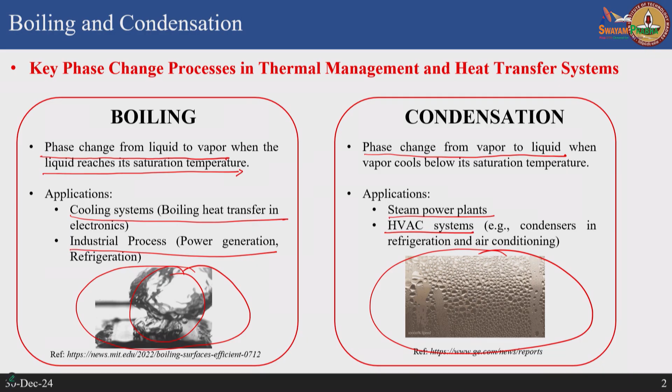That is because locally at the window pane your temperature is less than the dew point temperature, because it is not just a single component vapor outside. You should understand that in real life there is nothing like only water vapor - it is also a mixture of water vapor plus atmosphere. So as far as water vapor in this mixture is concerned, dew point temperature is more important than saturation temperature, because water vapor is only a fraction of the entire atmospheric pressure.

So you have to look at the partial pressure of water vapor and find the corresponding saturation temperature at that partial pressure - that is your dew point temperature. If your atmosphere is saturated with water vapor, the relative humidity is 100%, then the dew point temperature will be very close to the saturation temperature corresponding to the saturation pressure, because the air is saturated. It does not mean this is 100 degrees, because the saturation pressure of water vapor at that particular temperature will be limited, so you have to look at the tables.

If it is 30 degrees, for example, the saturation pressure may be something like 0.03 or 0.04 bar. So at that pressure, 30 degrees is your dew point temperature. If your local temperature falls below 30 degrees, and your atmosphere is completely saturated with water vapor, all of this is going to condense. You will see this formation of water droplets nicely on the mirror or glass surface.

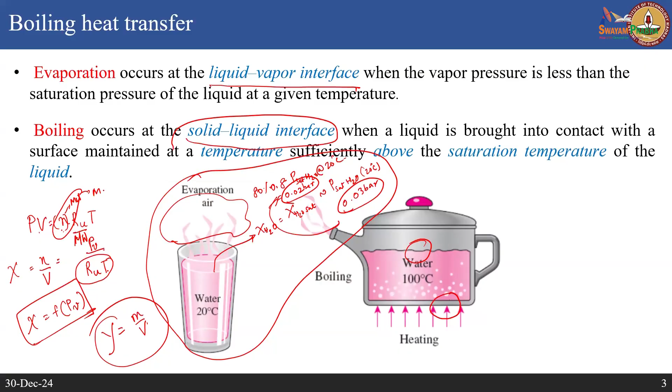So of course there is some evaporation happening here, but the boiling that we are referring to is the nucleation of bubbles that you see at the heater and liquid. So that is the boiling process, and what is the driver for this boiling? It is essentially temperature gradient. If you do not have temperature gradient, you do not have boiling, period.

Whereas evaporation can happen even without temperature gradient. You keep a drop of water on this table, and the water is isothermal with surrounding, and the table is also isothermal, but even then after 1 hour you will see the water droplet has evaporated. So it is only driven primarily by the concentration gradient, and of course if you have a heated surface, it is going to augment this evaporation process.

So why does the heated surface augment the evaporation process, although it is primarily driven by concentration gradient? The saturation pressure is a function of the temperature. If you are raising the temperature of the substrate, the saturation pressure goes up, thereby the concentration gradient increases. So at the same outside temperature of 20 degrees, if I heat my wall and raise it to say 60 degrees, my evaporation will be more vigorous because locally my saturation pressure is higher at the interface of the liquid and the vapor.

So although the evaporation process is affected of course by a temperature difference, it is affecting it through the Clausius-Clapeyron equation, which is basically relating the saturation temperature to the pressure, and not directly, whereas boiling is completely influenced only by temperature difference.

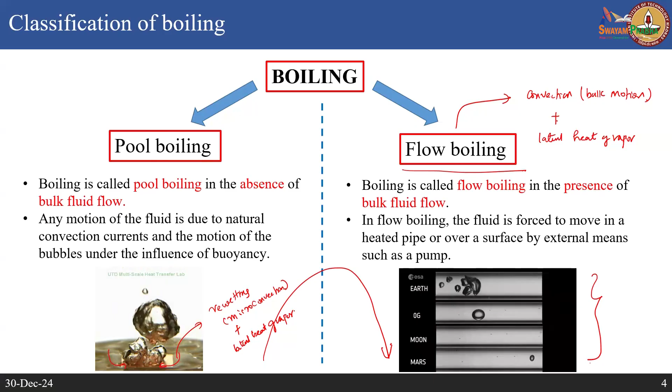Now, this is a very interesting picture from the European Space Agency. They conduct missions called parabolic flight tests, where they fly an airplane under different accelerations—negative acceleration, 0 g, and positive acceleration—to study different gravity conditions and how boiling, whether flow or pool, and the bubbles, look under them. For example, in this case there was a flow boiling setup carried on a parabolic flight undergoing multiple accelerations, and you see the normal 1 g condition on Earth.

So this is the kind of bubbles you see nucleating and then going, followed by some smaller bubbles at the back. Now, once you go to 0 g, the boiling process looks completely different. In large extent, if you look at pool boiling, these bubbles nucleate, grow, and then detach, and the detaching process is primarily driven by buoyancy. This is more prominently seen under 1 g environment.

Now, if you go to 0 g, or microgravity, where there is hardly any buoyancy force, then there is nothing to detach the bubbles. So what happens is these bubbles keep growing until they become very, very large, and then maybe at some point they detach because of some other instability or perturbation, but by themselves there is no buoyancy to detach them.

Now what you see in these tubes is some of these bubbles become so large that they fill the entire diameter of the tube, and then they have to keep moving on because of the convective motion. But in the pool boiling case, you will find these bubbles become very large and hardly even detach. This is also seen to some extent in smaller gravity conditions like the Moon or Mars, but 0 g is an extreme case where you hardly have any buoyancy forces for detachment.

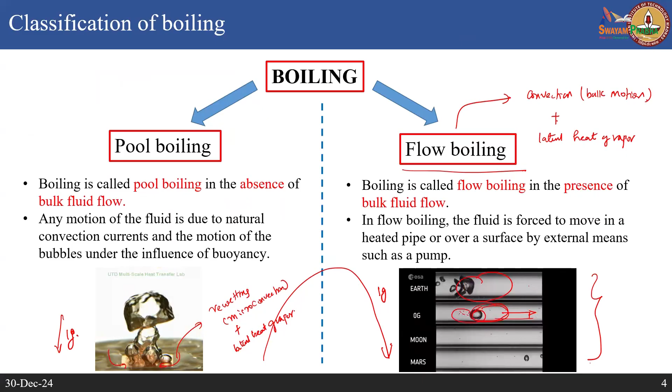What are the applications for the 0g case? Fundamentally, it is mostly about understanding the physics of boiling under different gravity conditions. Second, it's about designing boiling-based heat transfer processes in spacecraft cooling and thermal management, whether using pool boiling or flow boiling systems. You need to understand how they will perform at reduced gravity compared to terrestrial gravity conditions. At room conditions you may see excellent performance of your system, but once it goes there, you may see that the system is hardly moving, because the bubbles are all just blocking and nothing is moving. So you have to understand the fundamentals of this.

Depending on the temperature of your water when you start the boiling process: if you keep the water below the saturation temperature, that is the bulk of the fluid is below saturation while the substrate is heated above saturation, this is called subcooled pool boiling - this is a pool boiling case, which can also be extrapolated to flow boiling. In case your entire water is kept exactly at saturation temperature and your surface is heated above the saturation temperature, this is called saturated boiling.

You have to understand that subcooled boiling and saturated boiling can produce completely different boiling mechanisms. In subcooled boiling, boiling is initiated right at the interface of the solid and liquid in terms of small bubbles, which then have to rise as you keep increasing the heater temperature. As you go up, the temperature of the bulk liquid is much lower than saturation. It does not promote a state where the bubble can remain in vapor state - they collapse again, so they cannot reach all the way up to the liquid vapor interface.

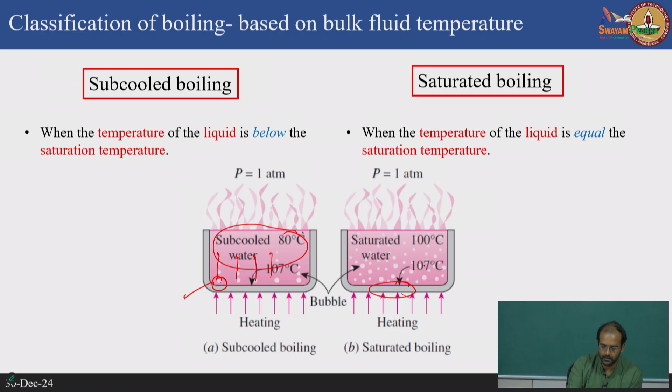Whereas in the case of saturated boiling, you will see there are two types of nucleation. One is called heterogeneous nucleation - why do we call it heterogeneous? Because this is happening at the interface of a solid and the liquid. Whereas here, because locally the temperature is above the saturation temperature, you can also have pockets of vapor that happen due to evaporation, which is called homogeneous nucleation.

So when you have saturated boiling, homogeneous nucleation also can happen, so you will have more vapor pockets everywhere within the fluid. Apart from the nucleation happening at the interface, you can also have vapor pockets spread all around your fluid, and you will see to some extent there is more nucleation of vapor pockets also on the liquid side.

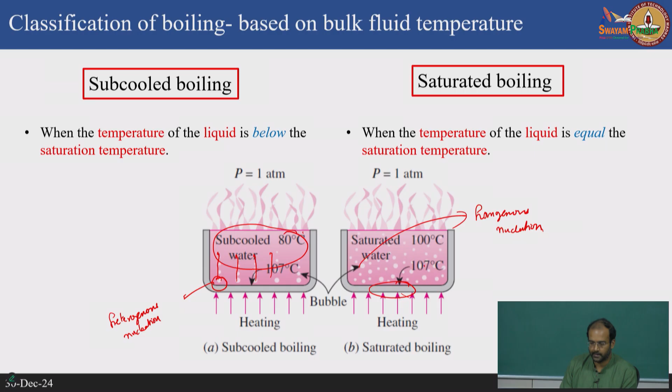Now let us quickly go through this pool boiling curve. This was considered one of the most fundamental and groundbreaking experiments as far as boiling heat transfer is concerned, and it was done under a saturated boiling condition - that means the liquid is at saturation temperature. You have a heater, like a wire - some kind of nichrome wire - and you supply power directly, DC power, to this heater wire, and in the process the wire gets heated and the surrounding fluid also gets heated. So this is the kind of experimental setup - it looks quite simple.

This was first done by Nukiyama, a Japanese scientist in the early part of the 20th century, and this boiling curve is named in his honor as the Nukiyama boiling curve. What he did was use power-controlled heating - he was able to control how much heat flux he supplied to the nichrome wire, rather than controlling the temperature of the wire. This boiling curve can be obtained either way: you can control the power and plot the boiling curve, which involves plotting the heat flux you are measuring or supplying to the heater as a function of what is called the excess temperature difference - the temperature of the wire or surface minus the saturation temperature.

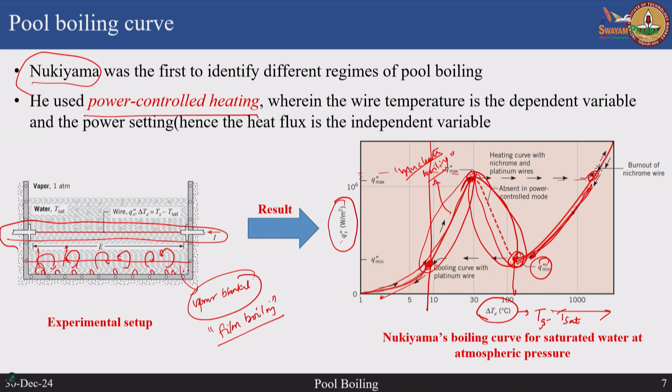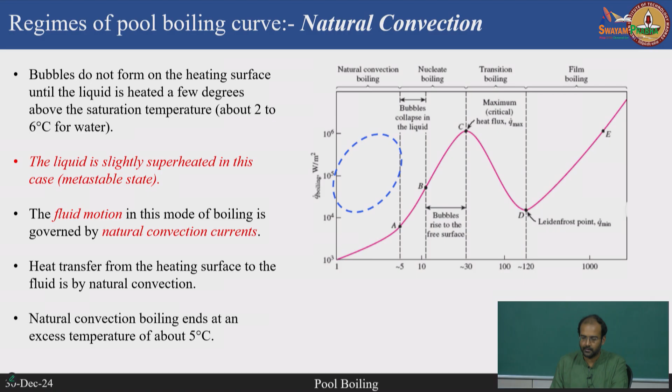The reason we should understand this boiling curve is that, as a designer, when creating any heat exchanger design, the flow rates and so on should be designed such that you never exceed the critical heat flux. Therefore you need to know how to predict the critical heat flux for a given condition. I think I have explained most of this process in a concise manner, but when I share this PDF you can go over some of the details.

One more question you should ask is why nucleation does not happen immediately after exceeding the saturation temperature. For example, at 1 atmosphere water's saturation temperature is 100 degrees. Why does nucleation not happen at 100.1 degrees, or at 100.2, but rather it takes 5 or 6 degrees superheat for the onset of nucleate boiling?

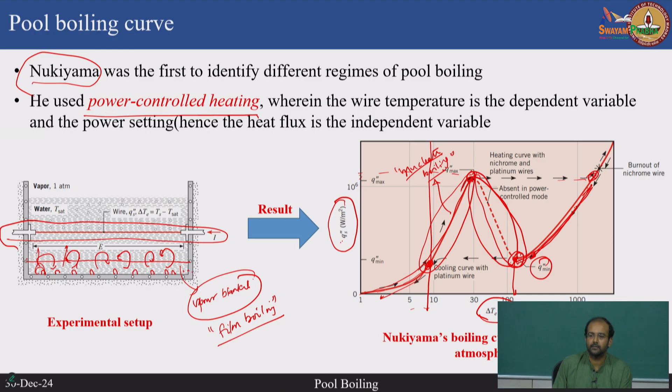The answer to that again comes from thermodynamics. Basically when you are talking about boiling, if you look at very small scales, maybe nano scale, if I have a roughness, a vapor pocket has to be created. This is the surface, and we are talking about a rough surface which has roughness elements. So where do these vapor pockets get created? They get created in these cavities where you have roughness. So you can actually alter the nucleation characteristics by changing the surface characteristics.

So now if this vapor has to be nucleated, assuming you have a small micro bubble generated within a cavity, it has to satisfy the Laplace-Young equation, which gives you the mechanical equilibrium between the vapor and the surrounding liquid. So you have a vapor bubble with a certain pressure inside, the vapor pressure, and outside you have the liquid pressure. These two pressures cannot be the same because the vapor is in a stable state, so there is also a surface tension acting normal. Therefore the vapor pressure has to balance the cumulative effect of the surrounding liquid pressure and the surface tension force. That is given by the Laplace-Young equation.

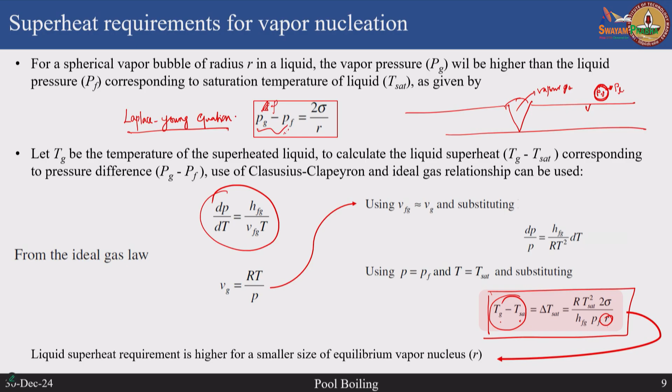Now, there are also some understanding from pool boiling experiments about other mechanisms, like how the diameter of the bubble behaves when it departs from the surface. So there is nucleation of the bubble, then detachment, and these bubbles keep rising up. So how do we calculate the diameter when it departs?

This has been looked at by different people, and there are primarily four forces acting on the bubble. When the bubble is still nucleating, you have surface tension, and when it is about to grow and detach, you have buoyancy and drag force. The buoyancy and drag forces attempt to detach the bubble because they act in an upward direction, while the surface tension and liquid inertia prevent the bubble from detaching. So essentially it's a balance between these upward and downward forces. For example, to calculate the average size of the bubble when it departs, you have to balance the buoyancy force with the surface tension force, since buoyancy is trying to detach it while surface tension is trying to hold it.

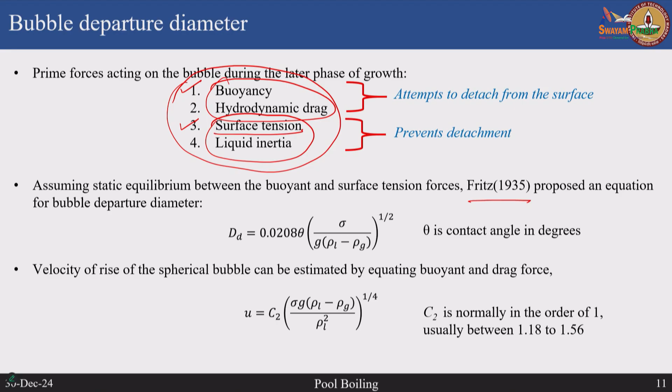So if you do that balance, I think Fritz in 1935 came up with this classical equation for calculating the bubble departure diameter, and from there you can also estimate the velocity of this bubble when it rises up.

Apart from the bubble departure diameter, you also want to know the rate at which these bubbles depart - whether there is only one bubble departing per second, or hundreds of bubbles departing in 1 second. These are also given by some kind of empirical model.

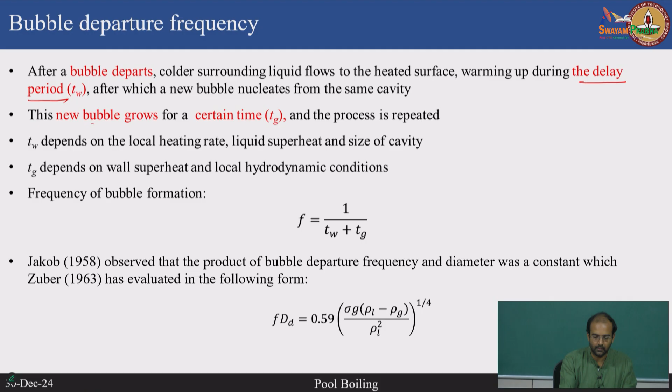There are two time scales involved. One is the delay period. First, once the bubble grows, there is a certain time it takes for the bubble to grow. Depending on gravity, at 0 g it is going to grow forever, whereas in earth gravity or hypergravity it grows very quickly. So the bubble grows for a certain time Tg, and once this bubble leaves, you have the cold surrounding fluid which is re-wetting, and it takes some time for this to get heated up to reach saturation temperature. This is called the delay period.

So your final time will be a combination of the bubble growth time Tg and the waiting time Tw. The inverse of this gives you the average departure frequency - the frequency between one bubble leaving and the next bubble leaving. That is given by 1 over Tw plus Tg, called the frequency of bubble departure.

There were some experiments people have done - people like Jakob in the late 1950s and Zuber - and they came up with a correlation where the product of bubble departure frequency and bubble departure diameter is given by a certain expression. It depends only on the fluid properties, so it is a constant. Once you know the expression for the bubble departure diameter, you can substitute into this and calculate the bubble departure frequency. These two are the fundamental things you need to understand in nucleate boiling.

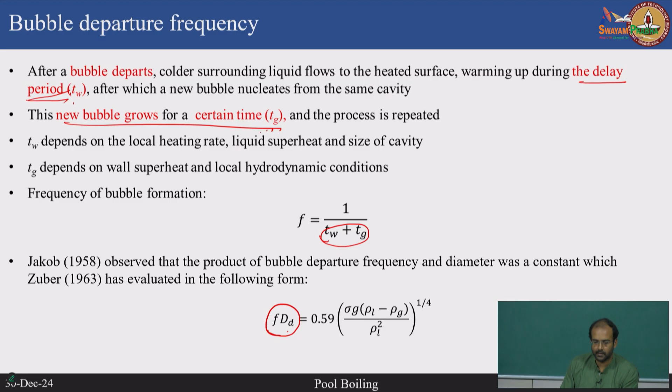I think I have talked about nucleate boiling in some detail, but you can always go through it. As I said, the heat transfer coefficients can range from 2000 watts per meter square Kelvin to up to 30,000 watts per meter square Kelvin, which is very large compared to single phase convective heat transfer coefficients, which come to the order of a few tens to a maximum of 100 watts per meter square Kelvin.

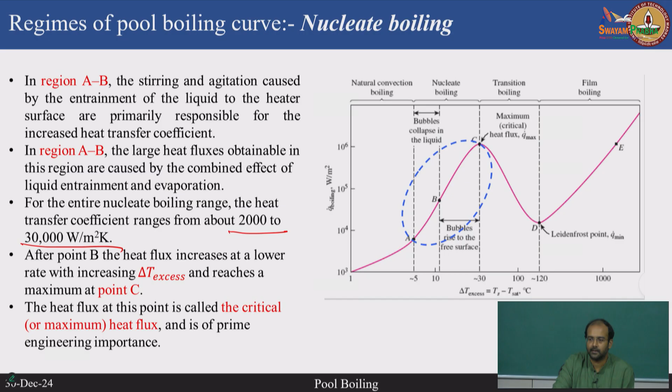So film boiling - this is something you do not want to stumble upon when you design your flow boiling devices, but as a fundamental understanding you need to know the point, the critical heat flux, beyond which further increase in heat can actually lead to an unstable state where the temperature can rise to a very large value, and then it can lead to melting or failure of your heater - that is point E.

Sometimes you also want to know the minimum heat flux that you can achieve. Basically in a controlled heat flux experiment, when you are reducing the heat flux, you reach the minimum value D, and below that it comes back to the beginning of nucleate boiling, and then back into natural convective boiling.

This is called the Leidenfrost point. So anywhere between C and E is your film boiling. The initial part from C to D is called transition boiling, where you have both convective effects - there are some vapor bubbles still nucleating. In film boiling you do not see any vapor bubbles; they are all completely coated by a very thick vapor blanket.

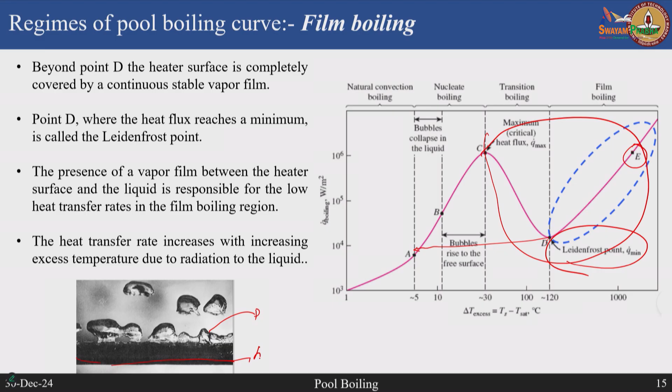So you see this is the snapshot of what happens in film boiling. You can see this is your heater, the black one here, and there is a very thick vapor blanket, and if there are any vapor bubbles, they are nucleating from the interface of the vapor and the liquid - they are not happening right at the surface of the heater.

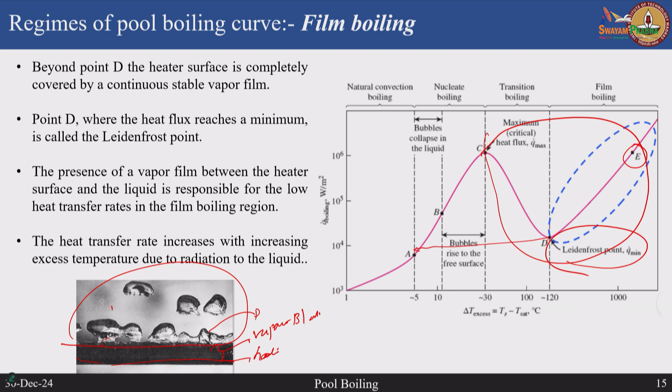So this is typically how the image looks. As I said, if you do not stop at C and try to increase the heat flux, it is going to cause burnout, because the excess temperature exceeds the melting temperature of your heater.

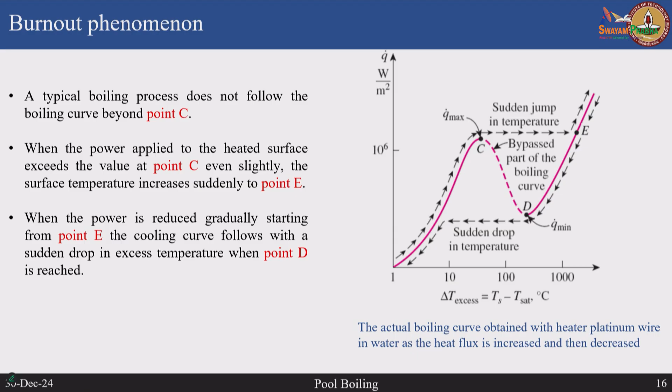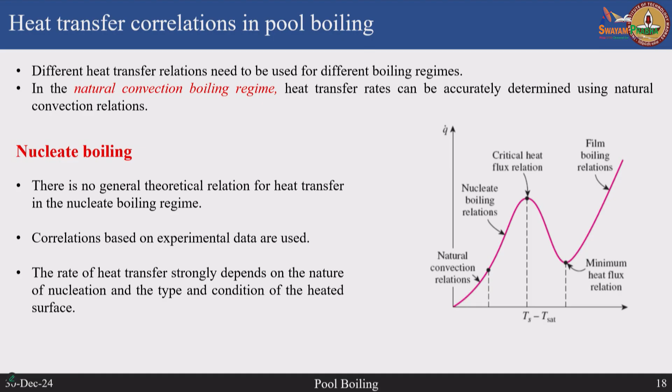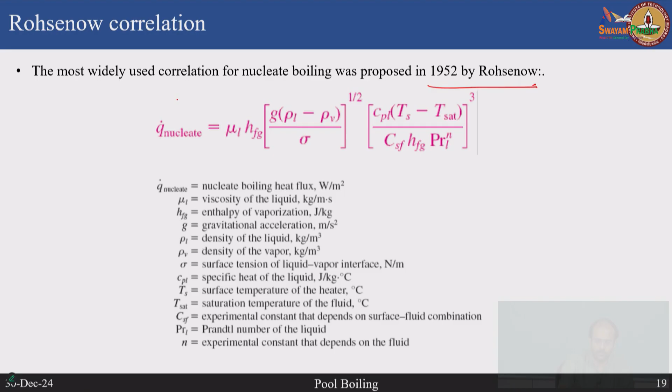Okay, now coming to important correlations. You need to understand the correlations to predict heat flux in nucleate boiling, because this is the most effective boiling regime. The most important correlation was given in 1952 by Professor Rohsenow at MIT. Even now we have labs named after Professor Rohsenow there. He did a lot of experiments on nucleate boiling, and he proposed an experimental correlation for predicting heat flux as a function of the fluid properties and the heater surface temperature.

Now, whenever you come across boiling or condensation, usually the temperature is not given as some T minus T ambient, but it is T minus T saturation, because saturation temperature is the reference. Otherwise it does not make sense to talk about boiling or condensation if you are not considering saturation temperature.

So these are all thermophysical properties of the fluid, like density of the liquid, density of the vapor, surface tension, the latent heat of vaporization, heat capacities and so on. There are a couple of constants.

So this is not the best correlation to describe nucleate boiling, because this is an empirical model, and you see there are a couple of coefficients doing the job of this empirical model: CSF, which is an experimental constant that depends on the type of surface and the fluid that you are using, and this exponent n, which is an experimental constant that depends on the fluid.

Now, when Rohsenow did this, of course he did it thoroughly, for a very wide range of heater and fluid combinations. You can see that he changed, for example, water with copper, and even within copper you have different types of surface roughnesses. As I said, your boiling process depends on the roughness of the surface, so you used a polished copper versus something scored, which means it is more rough. For each of these cases he deduced what is the constant CSF and the exponent n.

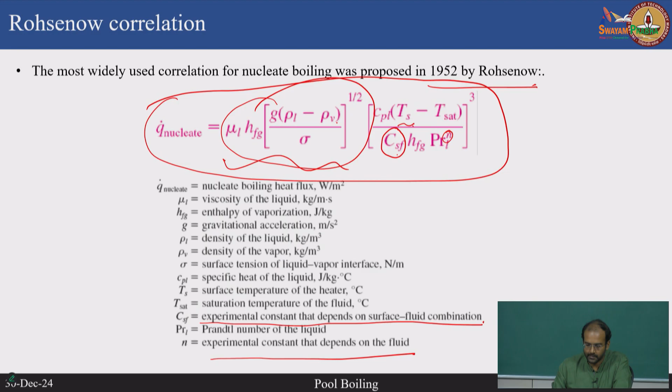And of course, if you look at the properties of water, they also change with temperature. So the question is, what is the temperature that you use? Generally we use some kind of an average temperature between the heater and the saturation temperature. We use all these properties at an average temperature, calculated as Ts plus Tsat divided by 2. For example, surface tension of water decreases dramatically as you go to higher and higher temperatures.

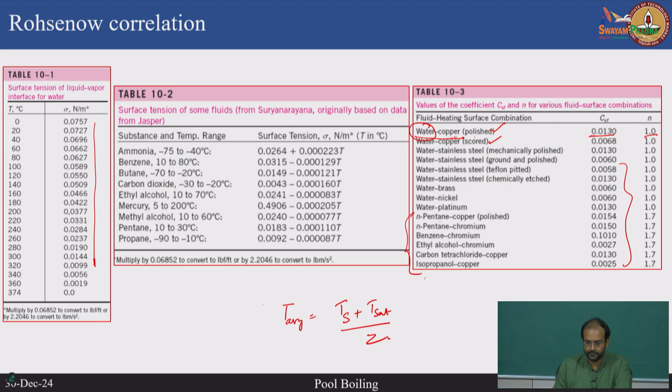The other important correlation that was also later added was the correlation for predicting the critical heat flux. This is something you need to know before you start designing anything with boiling, because you should know that you should not exceed this critical heat flux, so knowledge of critical heat flux is very important. This critical heat flux correlation does not depend on the fluid and heater combination, unlike your nucleate boiling correlation.

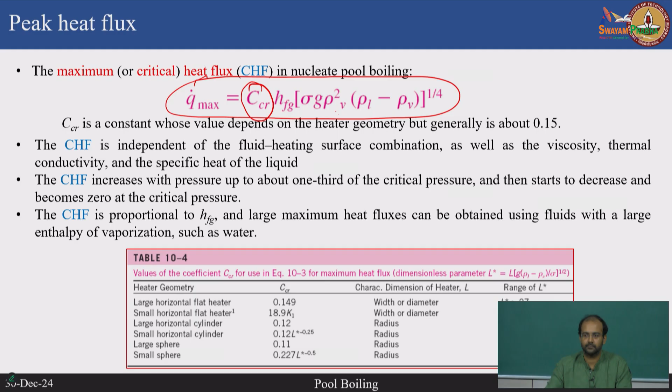So this depends mostly on the thermophysical properties of the fluid, and there is one coefficient called CCR, which is an empirical coefficient that depends on the type of geometry of the heater. It is not the same as the CSF from before, because that depends on the surface-fluid combination, but the CCR depends only on the geometry of the heater, whether you have a flat heater or a cylindrical heater or so on.

So for a flat heater you have a value which is like 0.149, if you have a cylindrical heater it is about 0.12 and so on. Apart from that, you can estimate the critical heat flux from only looking at the thermophysical properties of the fluid.

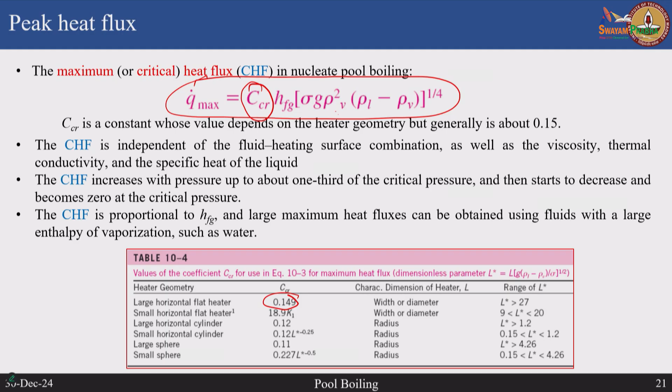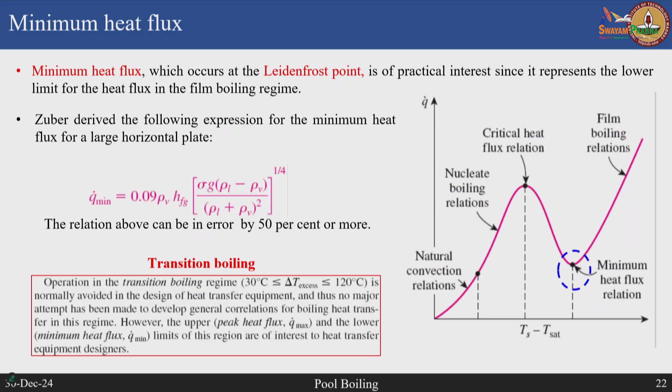Later, people also wanted to look at the correlation for predicting the minimum heat flux, which is called the Leidenfrost point. A person called Zuber was able to successfully derive the expression for that as well, correlated as a function of all the fluid properties.

Finally, film boiling. Of course, you do not want to operate your device in this regime, but people wanted to know if you have only a pure vapor film blanketing the heater, what happens to the heat transfer performance. So they came up with a nice correlation for film boiling. Surprisingly, this correlation was not actually developed for film boiling but for film condensation. In boiling, you have a heater coated with a vapor blanket.

In condensation, you are deriving it under gravity. You have a cold plate, and then a condensate liquid film on it, with vapor above. So this is exactly opposite: adjacent to the plate you have a liquid film instead of a vapor.

People derived this expression, called the Nusselt condensation theory or film condensation theory, and the same correlation was used for film boiling by just tweaking the coefficients, the C film. In condensation, the saturation temperature is above the surface temperature; here it's the other way, the surface temperature is above the saturation temperature.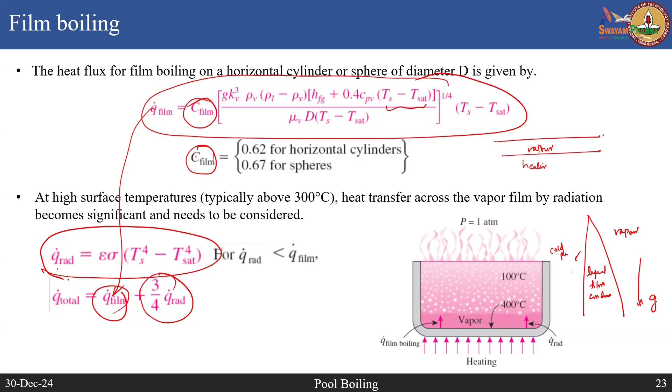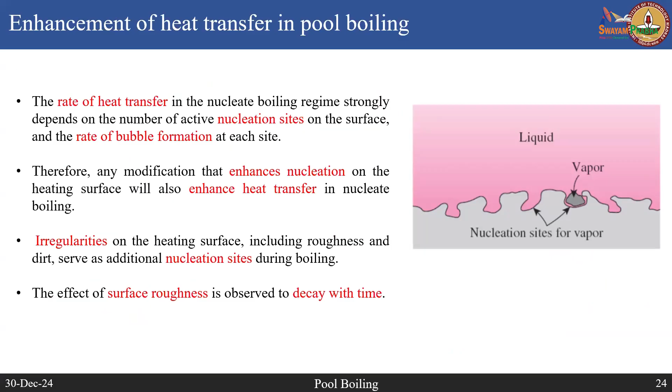Just a couple of minutes before we conclude this lecture. You now understand that what controls pool boiling is how we influence nucleation to happen, and nucleation happens at a very small scale, microns or even nanometers, at the heater surface. If you zoom in with a microscope or an SEM, you'll see this roughness is completely arbitrary. You don't have clear control unless you specifically fabricate the surface yourself, by polishing it smooth or controlling the roughness with a grit paper or sandpaper with a specific roughness coefficient, and so on. People slowly realized that many later experiments were not able to get a high quality of repeatable or reproducible boiling curves.

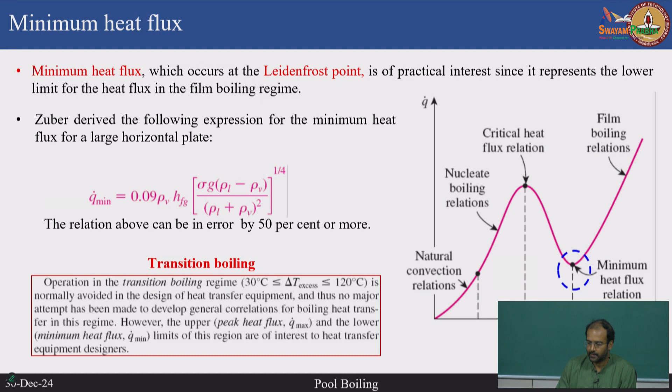The same boiling curve that Nukiyama obtained was with copper as a heater and water. If I do the same experiment with copper but change its roughness, I get a deviation from this boiling curve, because nucleation is influenced by surface roughness. The nucleating cavities are controlled by surface roughness, and if I'm not careful in maintaining either a completely smooth or polished surface, I can completely change the nature of these boiling curves.

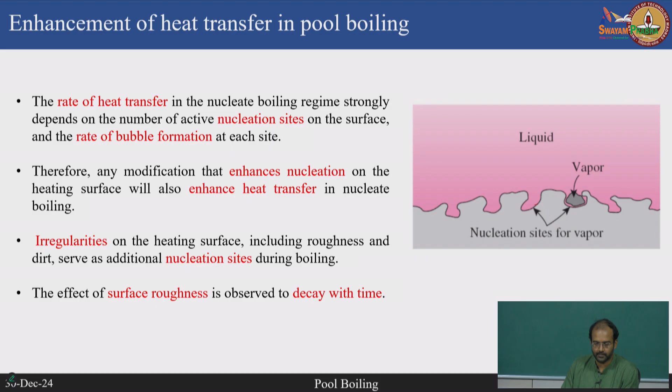So people also use this to their advantage. Since you already have a high improvement in heat transfer coefficient, if you further alter the nucleation sites by changing the local roughness, you can improve this even further. So they've done many experiments where they were able to enhance heat transfer in pool boiling by changing the nature of these surface structures.

People are looking at porous structures, where these pores have a specified void fraction or porosity, which can control nucleation processes. People were also using fins, micro fins, or mini channel fins to look at how nucleation is influenced.

In our own lab we have done pool boiling studies using mini and micro channel fin surfaces, and these are some of the foil temperatures we get using the infrared camera at different heat fluxes. The top is a heat flux of 8 watts per centimeter square and the bottom is 85 watts per centimeter square. We see that the nature of nucleation and surface temperatures are quite different when we use mini channels compared to a conventional flat heater.

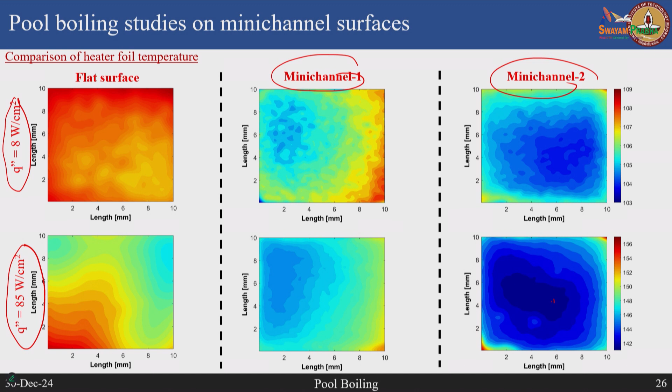If we use mini channels with a slightly larger dimension, we find we get a much lower surface temperature than with a conventional flat heater, which means the heat transfer coefficient is improved by using surfaces with micro channels or mini channels.

The main reason for this is attributed to added surface area—this is primarily a surface area enhancement effect. But apart from that, if you reduce the size of these mini or micro channels, you can also enhance the nucleation sites. The nucleation site density can be improved and controlled by reducing the size of these channels, which is another mechanism for improving the nucleate boiling regime.

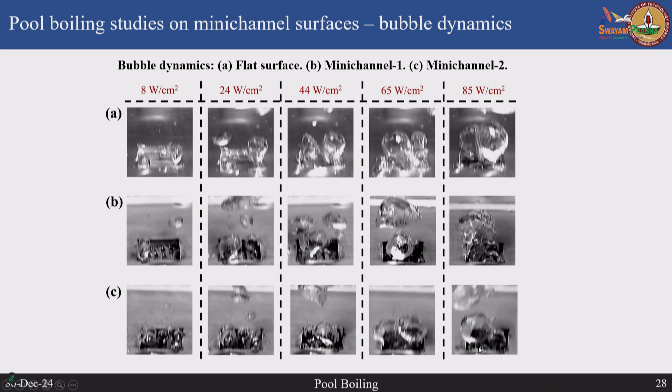These are some images showing that as we increase the heat fluxes—A is the flat surface, B is one type of mini channel, and C is another type—we see that in the flat heater it transitions to a very large bubble very quickly, whereas the bubbles are much smaller and more controlled when we use mini channels. We have also seen the effect of these mini channels on the departure diameter and bubble departure frequency.

The bubble departure diameters are slightly smaller when we have mini channels, which is good because it promotes more smaller bubbles, and the bubble departure frequency is also slightly higher—more smaller bubbles at higher frequency is more conducive for maintaining the nucleate boiling regime. With that, I conclude this first presentation on pool boiling.

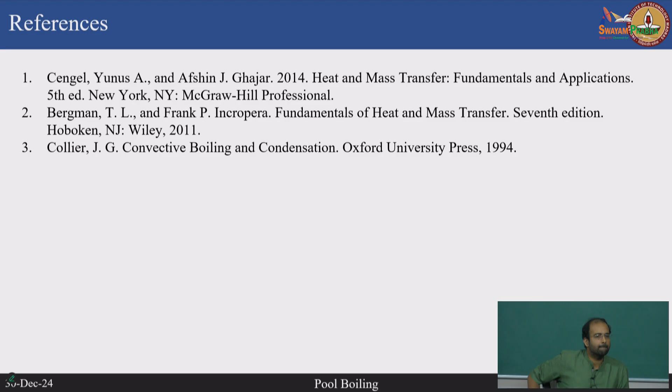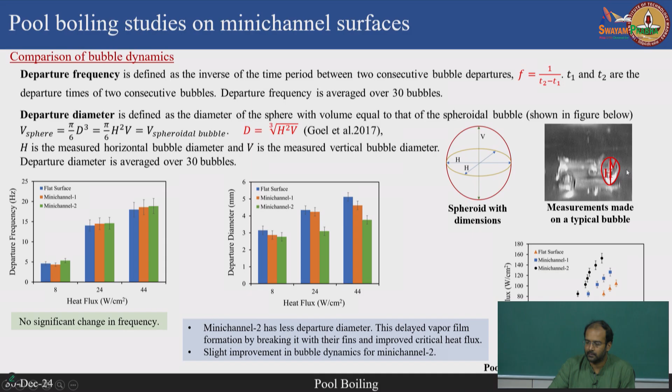That is like an equivalent spheroid that we assume. We equate it to a sphere with the same volume and then calculate the equivalent diameter, because these bubbles are not perfectly spherical, as you can see from this image—they have some kind of prolate shape, like a prolate spheroid or ellipsoid. We equate this volume to an equivalent sphere to get the equivalent spherical diameter. This is very standard practice.

But if you apply an electric field at the top, this elongation can become very large and there is a deviation from its spherical nature. We also measure that extent of departure from spherical shape. But in most cases, under normal earth gravity without any external electric field, it retains more closely to the spherical shape when it departs.

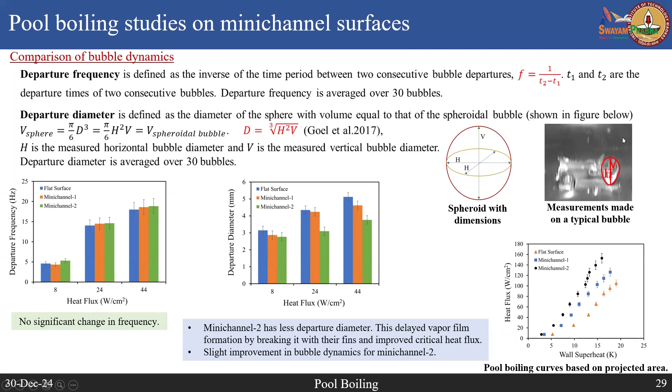It also depends on the wettability of the surface. If your surface is less wettable, like a hydrophobic or super hydrophobic surface, this angle will be much larger. Whereas in a highly wetting case, the liquid is able to form a smaller contact angle. If the contact angle becomes much larger, as in a super hydrophobic case, the elongation will become much more, because the contact angle is larger and the departure from spherical shape becomes much greater.